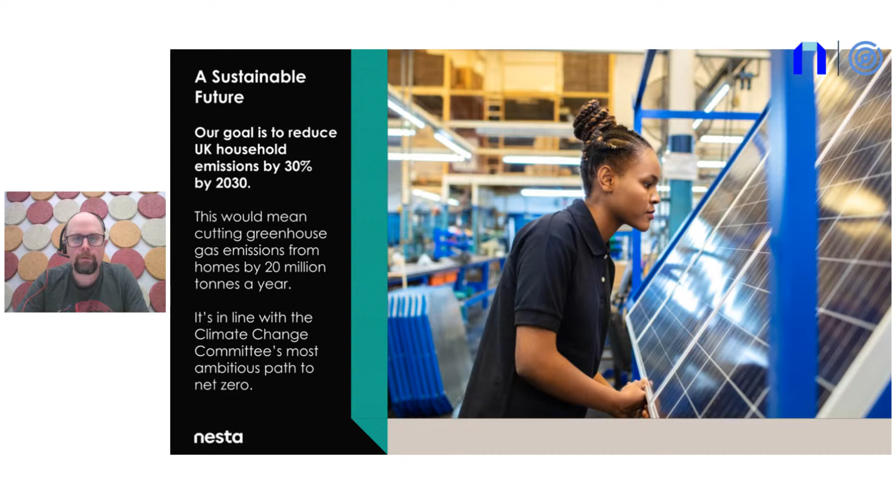Our partners on the HeatFlex project are Centre for Net Zero, CNZ. CNZ is an impact-driven, not-for-profit research unit founded by Octopus Energy. Their work is grounded in real-world data via access to tens of billions of Octopus Energy customer data points, giving valuable insights into the real behaviours of people and businesses. While CNZ is part of the Octopus Energy Group, they operate autonomously and set their own public interest research agenda to accelerate the energy transition. Nesta and Centre for Net Zero are both interested in ensuring the future energy system is built around people.

At Nesta, one of our areas of focus is energy flexibility. We want to maximise the potential for homes to play a part in this, but we also want big policy decisions to be based on realistic assumptions about its potential. And real life trials are the best way to improve those assumptions. So today we're talking about HeatFlex UK, a pilot project where we remotely controlled heat pumps to shift demand away from peak times. We monitored participants' electricity consumption and asked them for feedback on their experience.

We had three key research questions. How much flexibility can we really get from heat pumps? Is third-party automation of heat acceptable to consumers? And can we understand how consumers' comfort preferences influence their home's flexibility potential? The pilot ran between January and April of this year, and we had 12 households participating in 20 events. The main purpose was to test and refine our methodology for a full-scale randomized control trial, which we aim to run in winter 23-24. But we think we've learned some interesting things in the process, which we'll share today when we get to the full presentations.

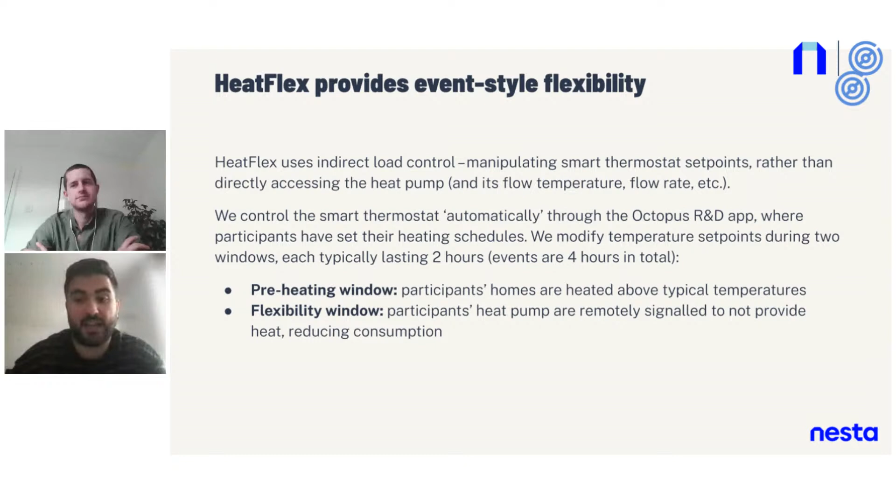And this correlates to periods of the day in which we have a very high demand, which also correlates to very high carbon intensity in the grid. And then after that flexibility window, we will come back to the normal operation that people were kind of like scheduling their heat pumps for.

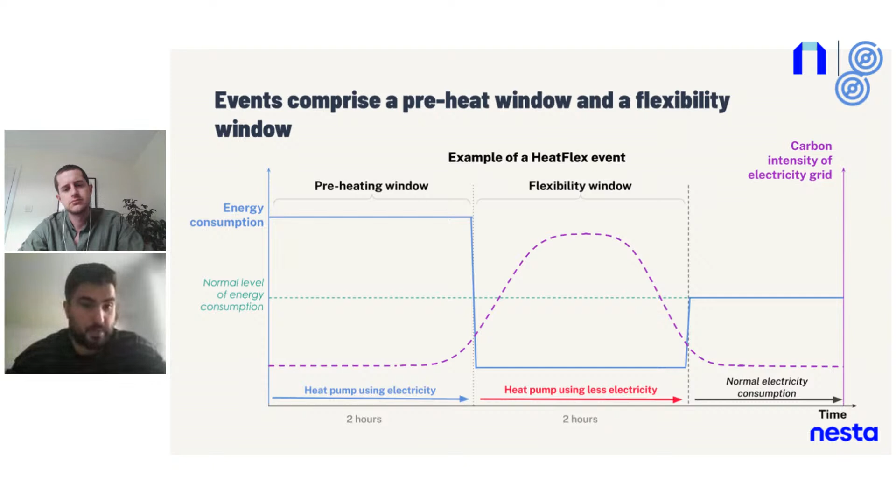After this, it's important also to mention that this was not a trial in which we were aiming to harness the highest amount of flexibility. We were just trying to check whether flexibility was achievable whilst maintaining comfort in the household. So basically, these temperatures that we increase for in the preheating window and then decrease for in the flexibility window were elicited temperatures. So basically, we asked our participants at what temperatures they will feel comfortable, both maximum and minimum, respectively, for the preheating and then the flexibility window.

So in this case, we were trying to maintain comfort while harnessing some flexibility. So the aim of the project was to see whether there is some inherent flexibility that we could get whilst people had some levels of comfort that we had to test as well, because these elicited preferences might not be then seen in the data that we are collecting from the trial itself. We also encouraged participants to basically drop off of the events, so opt out in cases where they were feeling either too warm or too cold during these preheating or flexibility windows, respectively.

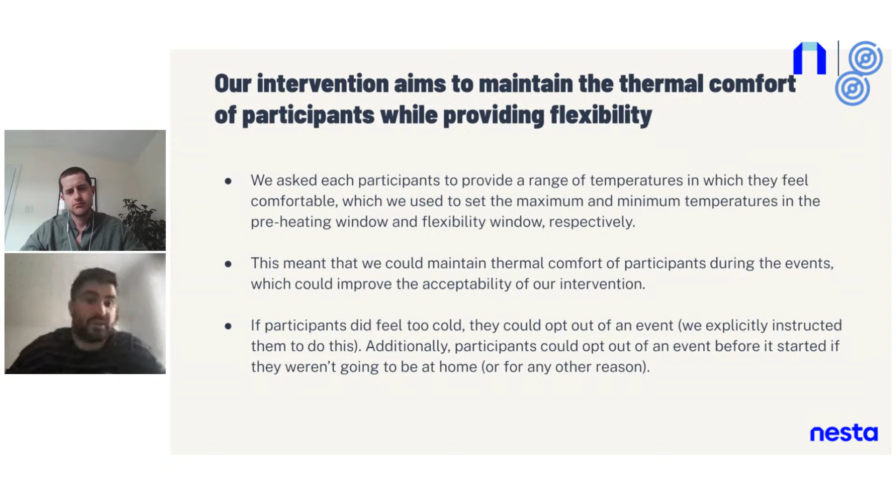Then we will reduce that temperature during the flex window to the minimum elicited temperature, as I mentioned a moment ago. And again, we might not reach that temperature at the end of the flex window, or we might reach it way before, in which case we will maintain that temperature over time. And then when the HeatFlex event per se finishes, we will go back to the average comfort temperature that our customers had elicited in this survey that I mentioned a moment ago.

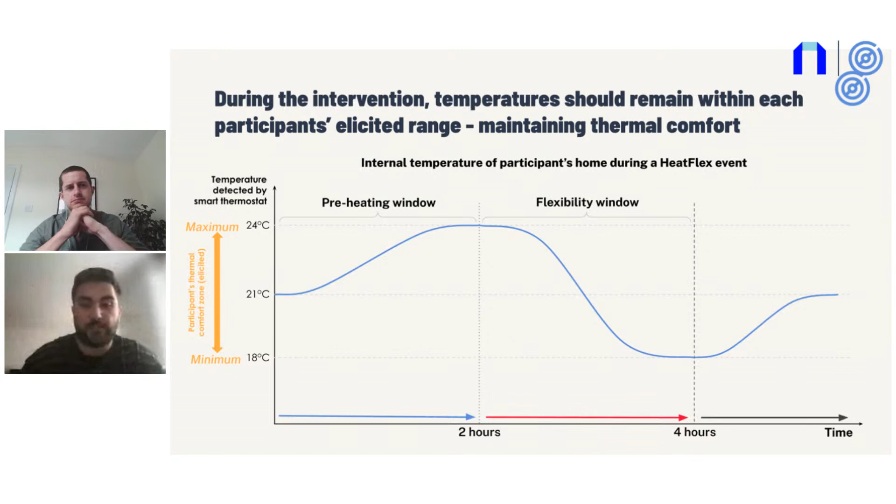So we used mixed methods to analyze how our participants experienced these HeatFlex events. Basically, we had access to smart meter data, which I'll explain in a second. And we also had several surveys and one-to-one interviews with our participants to know how they experienced these events and what was the overall sentiment and the overall feeling towards the HeatFlex intervention, to know whether this automation in principle is acceptable and whether our customers presented comfort levels that we could actually say were acceptable to them.

So in terms of the smart meter data, we analyzed all the electricity consumption from all the 12 participants that Andy mentioned a moment ago across different events. These 12 participants represent a varied setup. This means that some people might have access to different LCTs, such as solar panels, batteries, electric vehicles, apart from the heat pump. So in some cases, when people have batteries or solar panels, they might have different import and export MPANs. That means they might be injecting electricity into the grid, not only consuming electricity.

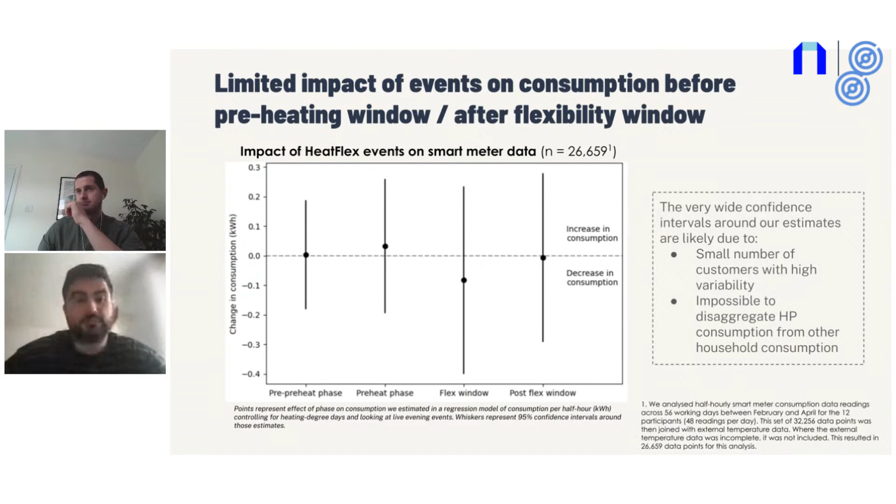After this, I'm gonna carry on with the survey findings. Sorry, Oli is going to carry on with the survey findings. So over to you, Oli. Great. Thanks very much, Danny.

So I'm going to first talk about the survey findings, which we wanted to do to get more depth of insight from participants about how they experienced the events themselves, and is a really important part of this study in terms of finding out more about why we may have got the findings we did from the smart data. We sent online surveys to participants by email at the end of each event, and we did that for a couple of reasons.

First of all, as Danny mentioned, participants could opt out both before and during events, and we wanted to find out some of the reasons why participants may have done this. The second reason is about capturing the experiences of participants during the event. So we wanted to find out what participants were up to during the events, how they found the events in terms of their thermal comfort, and how the experiences of participants might vary across different events, mornings and evenings, different times of day, etc.

And one of the reasons we were interested in asking each participant was because we expected essentially there to be differences across events. So we had 159 responses to the surveys in total. We had 26 cases where participants opted out before events. And the reasons they provided in the survey were mostly because they weren't at home or they were on holiday. And this was important because we didn't want to preheat their homes when they weren't at home and their heating might not be on.

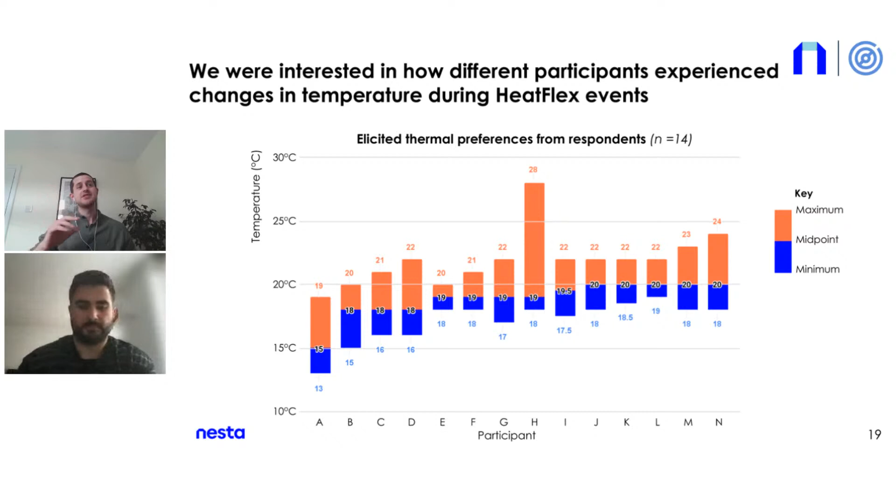So we were aware that different participants might have different responses to when we were both preheating their homes and also during the flexibility window when the heating might not be on. So we really wanted to use the online surveys to capture some of these differences. And we did find that in the flexibility window itself, there was a decrease in temperature. So we wanted to use the surveys to understand how participants found the temperature at the beginning of the flexibility window, just after preheating, and also at the end of the flexibility window.

And we do also have one incident where a participant's home increased during the flexibility window, which we found out from the surveys was because they used a log burner during the flexibility window itself. So it's good to do these kinds of surveys to find out about what may have been happening during the actual window itself.

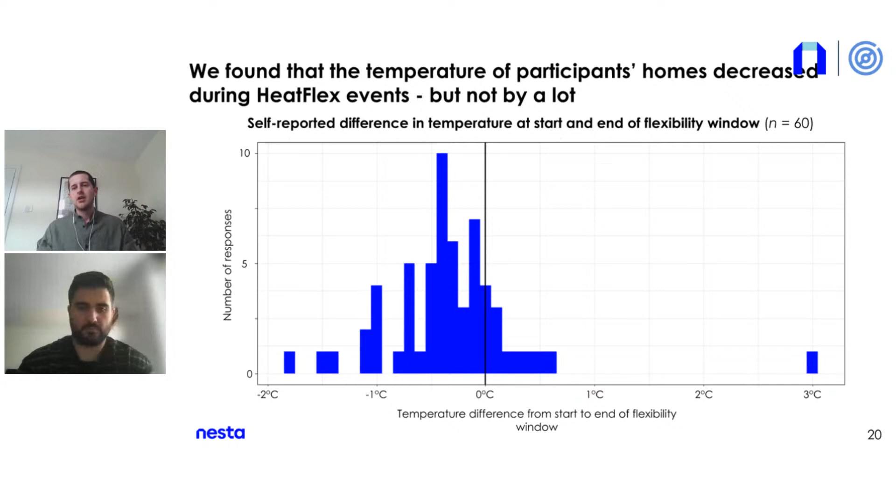So, for example, you can see there's one change where the rating went from uncomfortable to very comfortable at the end, and that actually was the case where there was the log burner. And it really suggests why asking participants directly about their experience is important, because this helps demonstrate some of the reasons why we saw the results we did for the smart meter data.

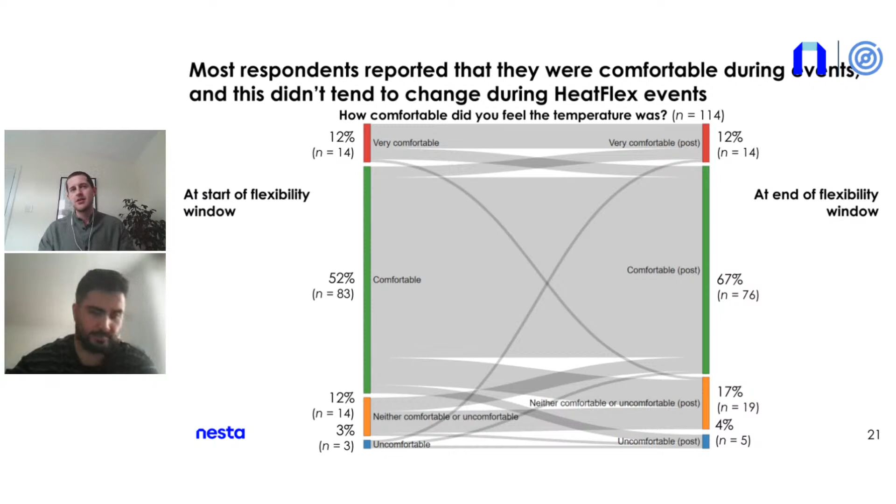So the next part I'm going to talk about is the user research. So this was the third data collection part we had for our mixed methods study.

As Danny set out, we actually interviewed a handful of participants on their experiences during the events. We used floor plans as a way of helping guide these interviews. So we worked with a handful of participants on mapping out what the floor plans of their homes look like, which I'll show you in the next few slides. This included things like where their radiators were, where the smart thermostat was, and where the doorways were in their home.

This really helped us understand contextual information about what happened during the events, so how participants behaved, but also to understand a bit more about each participant's home itself. This was really important because, although we only had 12 participants, each participant's home was quite different, and it meant that there was quite a varied response in how homes responded during the preheating phase and the flexibility window itself.

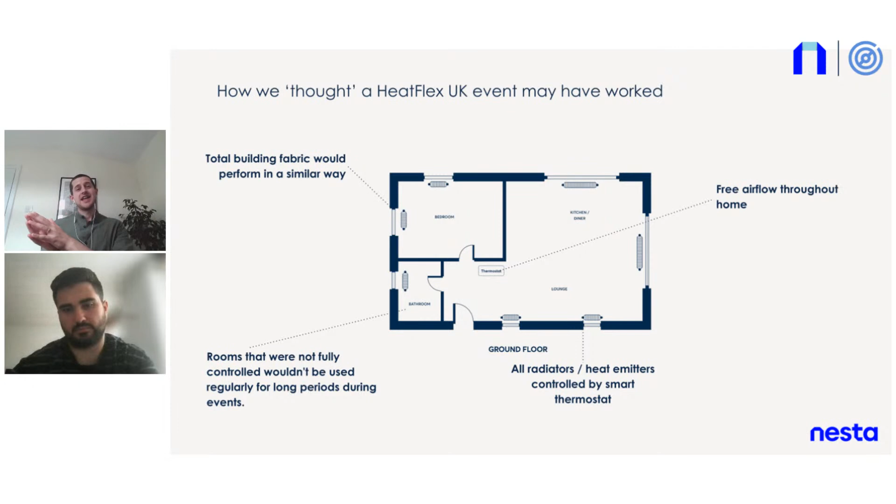However, as we found from the interviews, the reality of implementing our intervention in different homes was quite different. So on the next slide, we've got an example of a floor plan from one of the participants. This demonstrates the complexity of implementing our intervention in the real world. In the blue shaded room, their lounge, is where they had the smart thermostat. They tended to keep all the doors closed in their home, and the lounge itself cooled off quite a lot quicker than the rest of their home.

So it meant that during the preheating phase, the smart thermostat was calling for heat based on the temperature in the lounge, which was cooler, which meant that the rest of the home increased in heat above the preheat temperature, to the extent that the participants had to turn down the temperature setting on their radiators to prevent the rest of their home from heating up too much. So this is just an example of how the reality of our intervention was quite different to the simplified idea of it.

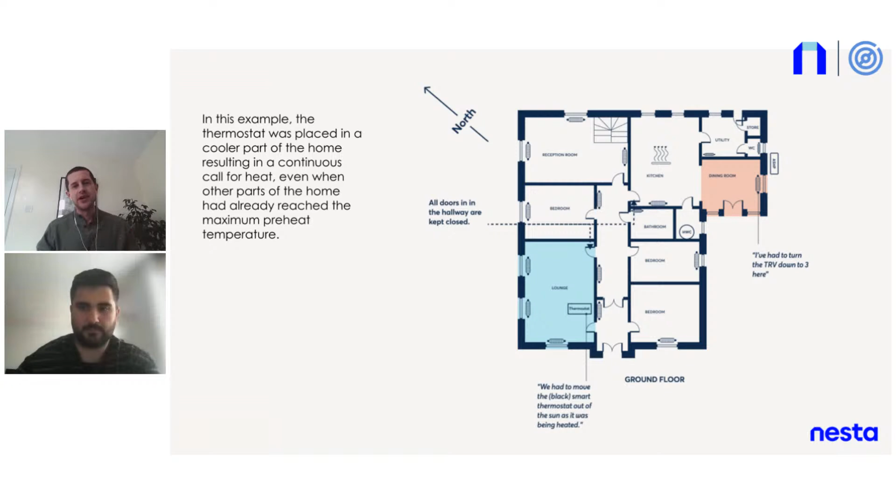I think these floor plans demonstrate the importance of using a mixed methods approach, so using qualitative interviews and surveys in addition to the smart meter data analysis, because from the smart meter data you get a very accurate estimate of what the flexibility is, but it doesn't present some of the complexity that actually occurs when you implement in the real world. So these are very interesting findings, and we plan on improving our intervention in the second phase based on some of this research.

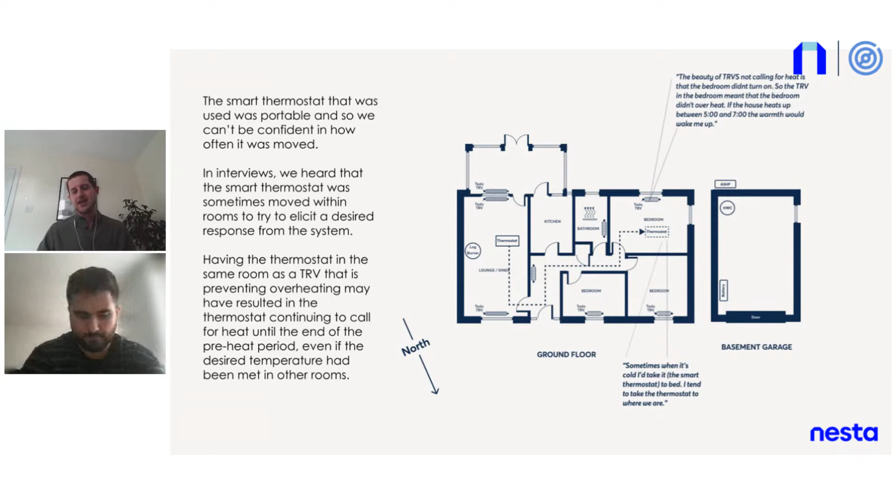So yeah, that's the end of my section. I'm going to pass over to Andy for the wrap up.

Thanks, Ollie. So I'll just whiz through this very quickly, just to really sum up what we think are the absolute headline findings of the pilot. Firstly, that our intervention basically seems to work within some quite noisy data. We saw, as Daniel said, a trend of increased consumption in the preheat phase and decreased consumption in the turn down period, which is what you would expect.

Secondly, participants broadly seem to find the automated control acceptable, and the negative feedback was mostly to do with the app that we've been using, which was still under development. And thirdly, we saw fairly low levels of opt-outs, with only those 11 occasions that Ollie mentioned where participants overrode our control because they were too cold.

As we've all emphasised throughout, this was a pilot with a small sample, so we're making no claims at this point as to whether these are generalisable findings. But the pilot has given us confidence that we're testing what we want to test, and that running the trial at scale will give us answers to our questions.

So just a little more about what the key differences will be in what we're thinking of as HeatFlex 2. The absolute primary outcome measure will be the kilowatt turn down that we've achieved during the flexibility window compared to the baseline. We'll monitor the consumption across those different periods, as Daniel mentioned, and it will be a randomized control trial where we will have, we hope, a control group of other customers who are not participating, who we can make a comparison with.

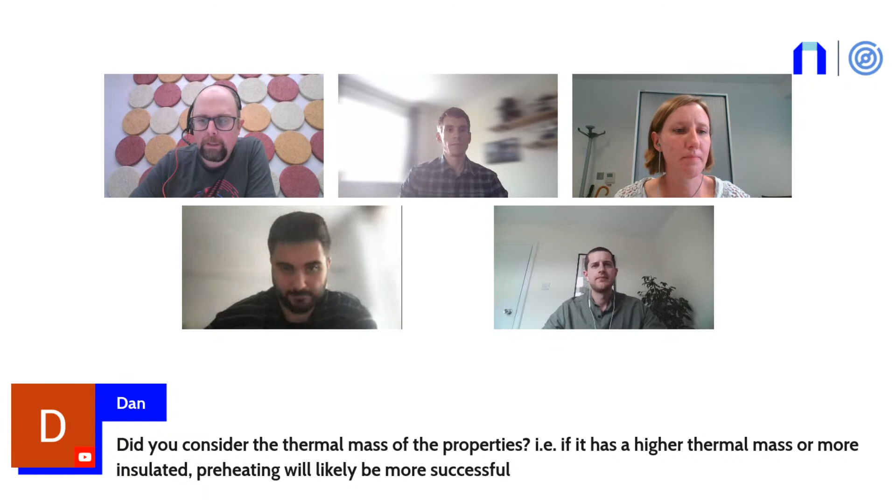I'm interested in perhaps Ollie reflecting on this one, whether we would also expect there to be a correlation between the EPC band and fairness, in terms of who lives in what kind of homes, and the relationship whereby a well-insulated home that perhaps retains more heat may actually be more able to provide flexibility. What might your expectations be about that, Ollie?

Yeah, I think it's a great question. I definitely think there's likely to be some kind of correlation in terms of household income and EPC. So it's something we plan on looking into for the main trial. One of the limitations of the pilot is we had quite a limited sample size, whereas for the main RCT we plan on having many more households, which means we'll be able to start to see how the flexibility varies between homes with different EPC levels. So hopefully we will be able to demonstrate empirically that there is also this correlation between EPC and flexibility itself.

Thanks, Ollie. I'm going to ask another question from Dr. Jason Palmer, asking: other things being equal, why would you expect lower overall energy use from the preheat, flex period, and recovery period? Jason would expect that to be higher because of the heat loss during the pre and post periods.

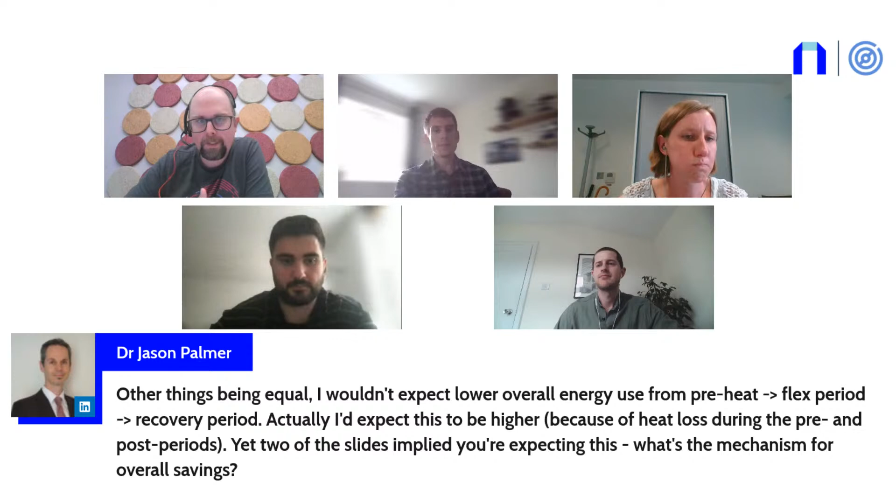And it feels like our slides imply that we're expecting this. I think we're not necessarily expecting it. As Danny will have said in talking through the slides, that's very much the platonic ideal of how the intervention would work on paper. It's sort of implicitly how it works in some of the modelling that's done for future demand and potential of flexibility.

So I don't think we have a hypothesis about what the mechanism for overall savings would be. It would relate back to the previous points about the overall thermal efficiency of the building and what else is going on there. So just to clarify that we're not necessarily predicting that. And obviously the key point will then be whether that potential net increase or net decrease is worth the trade-off of peak shaving and peak shifting and things like that.

There is a question from Ed Badham, which I might put to Jenny based on some of the engagement around the heat pump flexibility vision. Ed is asking, do you have any insights from distribution network operators on how open they are to integrating flexibility into their planning for grid upgrades and approvals for new connections? We've heard a little about that. The Equinox project is a DNO-led project, so they're very much interested in it and are going to be given more of a remit to procure flexibility alongside other things that will get the network to net zero. But Jenny, just interested in what you've personally heard by engaging with DNOs.

Okay, sure. Obviously the best thing to do is get their view and not my view. But from the discussions we've had, flexibility is one out of a series of options, and sometimes it might be cheaper to reinforce a network. Sometimes it might be cheaper to plan flexibility. From what I've heard, for new build areas, they're not relying on flexibility. They're speccing it as if there won't be, but that might not be every DNO. That's just what I've heard. So flexibility is one out of a number of options on the table. Makes sense. So there's not quite an emerging consensus then.